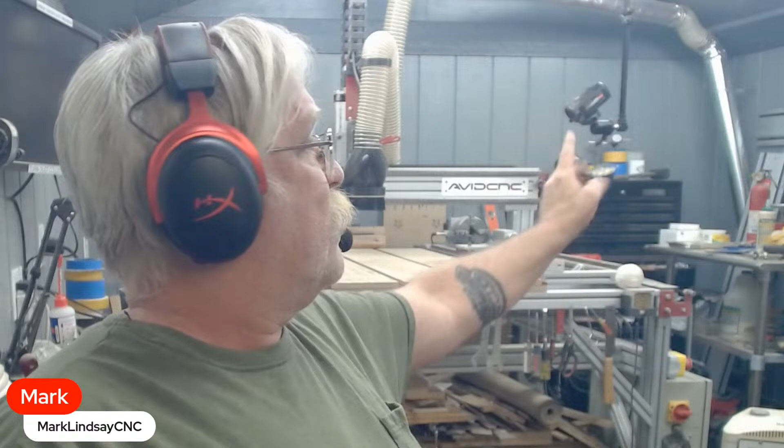So it's on a separate circuit. Each wall in my shop is a different circuit and the lighting is a separate circuit. My shop vac is over there, and my dust collector is also wired in over there, onto this wall circuit. It needs a 20 amp circuit.

My spindle is 220 volt, so it's on a 220 volt circuit. So all of mine are on separate circuits and I don't have any issues at all.

It's going to depend on the voltage of your VFD and spindle, but it's also going to depend on the amperage that your CNC controller and the machine itself takes.

My CNC is running off of the back wall circuit, and my computer slash controller, because I'm using Mach 4 right now. In fact, right over this shoulder, you can see that black plug right there - that's for my computer slash controller. The big black plug right there, that's the 220 volt, that's to my spindle.

You can't see it, but the control box right there is plugged in on the back wall. I would highly suggest you put the controller and the shop vac on separate circuits if it's at all possible.

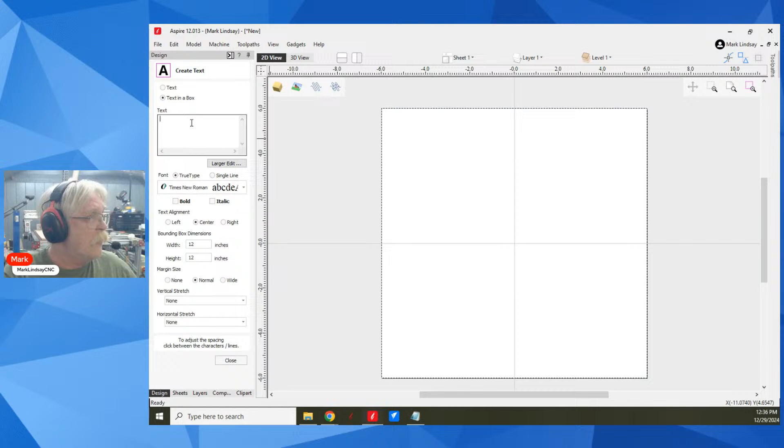I know how to space letters individually when in text mode, but how do I space an entire word? Ah, good one. So you want to, if I'm reading this right, what you're wanting to do is, let's go up here into my draw text tool, and we'll wait forever for it to load up all my fonts. And I'm going to stick with this one here. So you want to be able to space individual words. There are a couple of ways of doing that. Let's say...

Mark Lindsay CNC. Okay, close. If, for instance, these are too close together... I shouldn't have closed my text window.

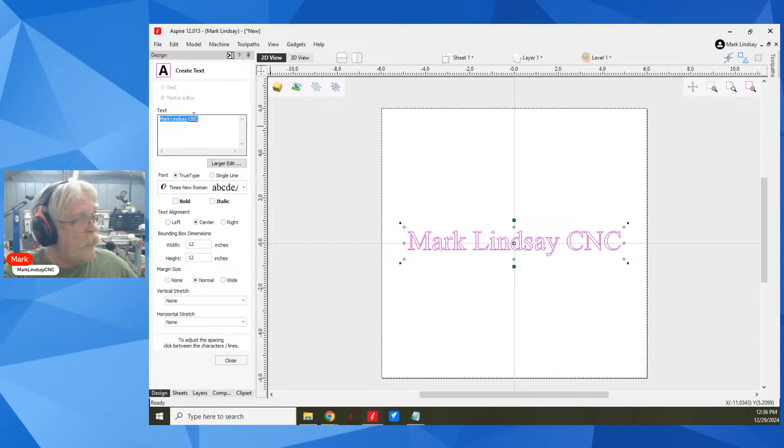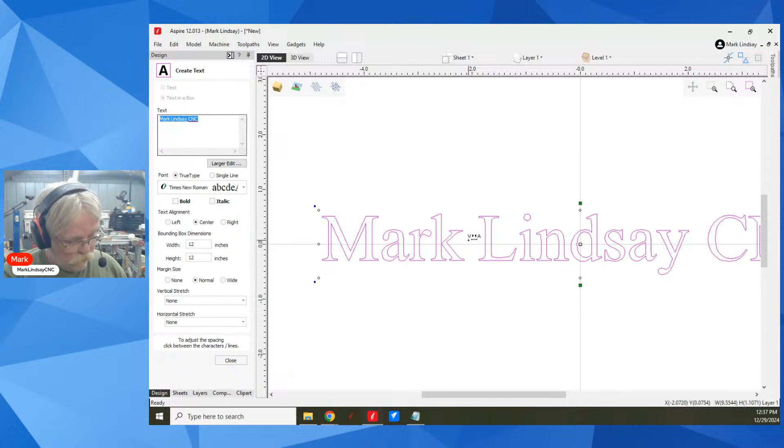If these are too close together, here within the text window with my text selected, I'll zoom in a little bit. Look at my cursor - you see how it has the plus sign? Then we have the V and the A with arrows pointing towards one another, little arrowheads there. If I click on that, it's going to bring those two words closer together. If I hold down Shift, you see those arrowheads point away from each other - now we're going to move them further apart.

If that's not enough, the only thing you can do from here is split them up by converting them to curves. Now, I don't think I can break text into lines. I would have to convert this to curves and then move them around individually.

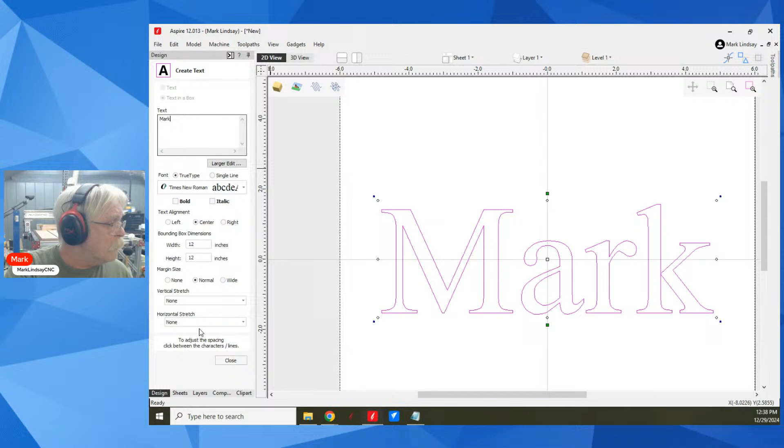But what I could also do is do each word separately. Now, this can be a pain, a major pain. And let's bring that margin size to normal. Well, I'll just close that.

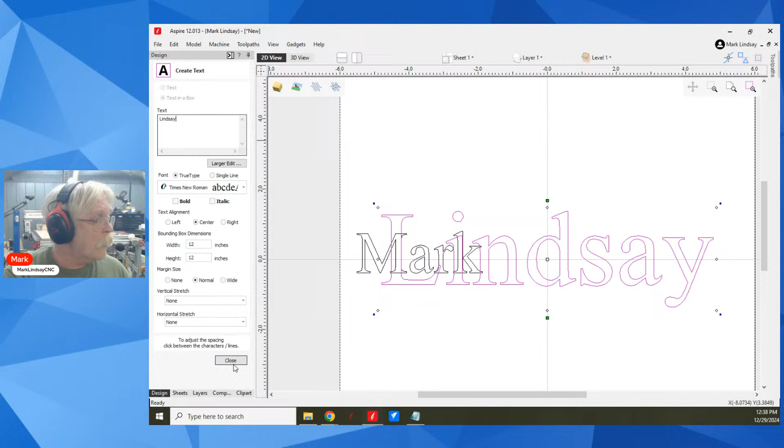Go into move and transform mode, hold down Shift, scale it down, slide it over. Then go back in without it selected and type the words in separately. Close it, move and transform mode, shrink it down - no, wrong one. Control Z, grabbed the wrong button. There we go. About like so - now I can move them separately.

If that's not what you want to do, we can again go back and close. Now, if I want to move these around, I can right click, convert to vectors. Now I can move them anywhere I want by going into move and transform mode, and spacing them out like such.

Now, the problem with this is they're no longer text objects. So if I select them and go back up here into draw text, it's going to open up my draw text tool, but it's going to deselect these. These are no longer text objects, so I can't edit them this way.

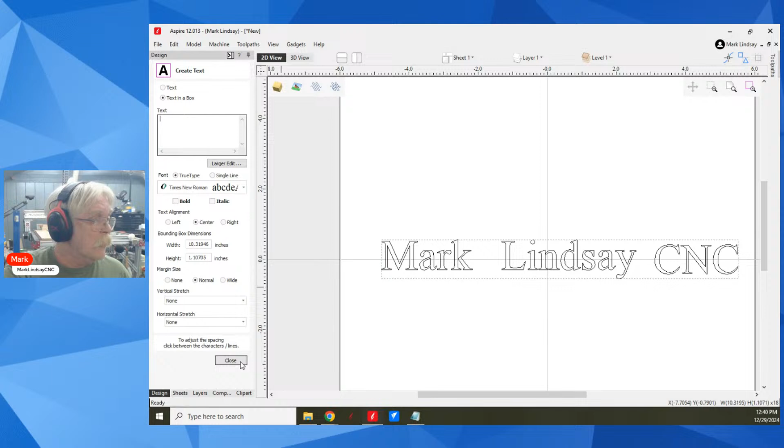So I would have to go in, delete it, and draw new text if I needed to edit, like if I discovered a spelling error or something. So you have Control Z to undo that, Control Z to undo that, Control Z to undo that, and now I'm back to having a text object.

And the way you could tell the difference is because we have solid pink lines. When I right click, they have changed it from convert to curves to convert to vectors here in the right click menu. It used to say convert to curves, which is why I said convert to curves earlier.

All right, let me see here. Still talking a lot about spindle warm up and what have you.

Again, it's always a good idea, as Pete says, best practice to warm up your spindle before you put a load on it - yes, especially if it's been really cold. So let's see here, and I hope that answered your question, Spider. And thank you.

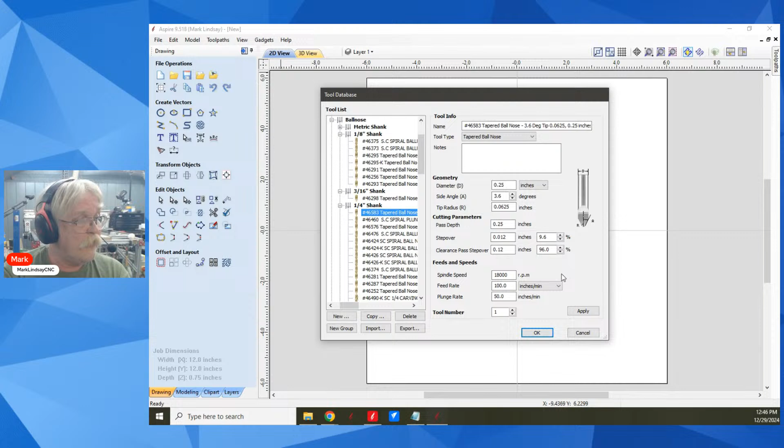Then if I buy a new Amana bit, let's say I buy this tapered... no, let's not go with that, 1/4 inch shank. Yeah, let's say I buy that tapered ball nose bit, the 46583. I will select it like I have here and export that tool file. Then go to my tool database in version 12 and import that tool here. So I only have the tools I own in my active version. There's no sense in having a bunch of tools you don't even own in your tool database.

It just becomes too cumbersome, and it takes a long time for it to load. Now multiply that by the Amana tool database, the Whiteside tool database, IDC Woodcraft database, and the Bits and Bits. You've got a bunch of tools you don't even own in your database. It's just easier to organize if you export individual tools that you actually own and put that into your current working version. That's what I've always done.

It really helps a lot when it comes to... man, I don't know if you can hear that or not, but it just decided to start raining like a son of a gun here.

It really makes a difference when you start accessing tools, because you'll sit there and wait forever for all those tools to load and populate in that tool database. So it works for me. I hope that answered your question, John. You have to do more than just download that tool database. You have to decompress it if it is compressed, a zip file for instance. You have to unzip it and then import that database.

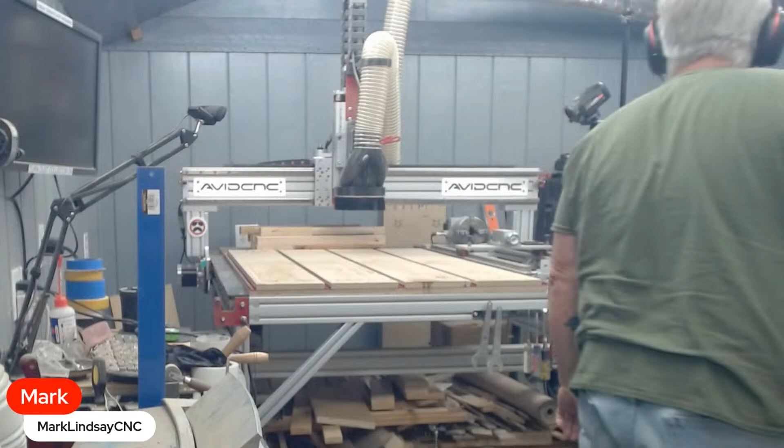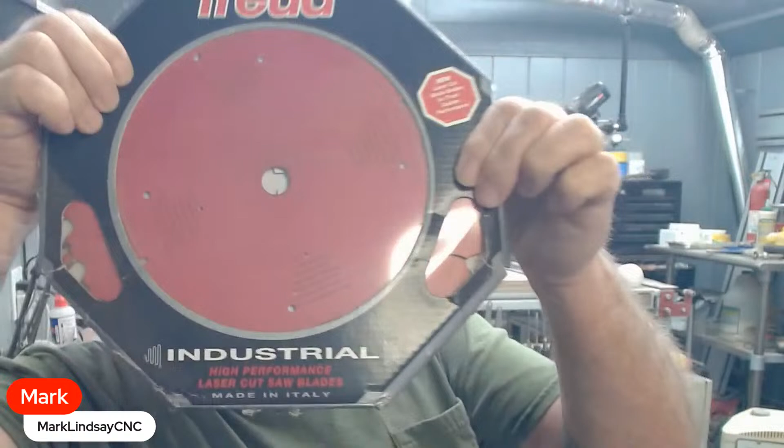There we go. Oh, come on, Mark. Put your fingers under it. It's a very good blade. It won't break the bank. Freud Industrial glue line rip. And it will give you a silky smooth edge.

I joint on my table saw. Now, you're asking, is it possible for it to do that? Anything is possible. It depends on how you're mounting your material. It also depends on the material itself. Obviously it's not straight, otherwise you wouldn't be jointing it, but has it acclimated to your shop, or is it still in the process of twisting and turning and moving? Let's see.

Yes John, I will put a link in the description to that blade. I'll put two links, one to the full kerf rip blade and one to the thin kerf rip blade. And I love these blades. They don't break the bank. They're 50 something dollars each, but that's what we used at the cabinet shop, and that's who I knew to go to when I wanted a glue line rip blade. And they're for ripping. I don't use them for cross cutting, and I don't use them for general purpose, just any kind of cutting. I use these when I need a nice smooth edge along a piece of material.

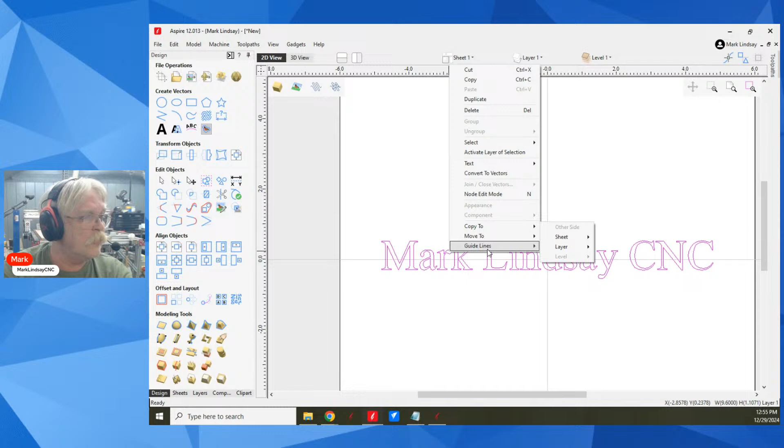David Hittenberger says, ungroup the words from each other, then select the word you want to move. Well, let's get in here and see if that'll work. Let me bring this back up. We'll select these. Now, let's see. Select text, convert to vectors, copy to, move to guidelines. Now, if you meant over here, ungroup, this is not a group. This is a text object. So this is not a group. Make sure you have selected at least one group that you can exit out of any active forms tools. Okay, let's go into text here and see.

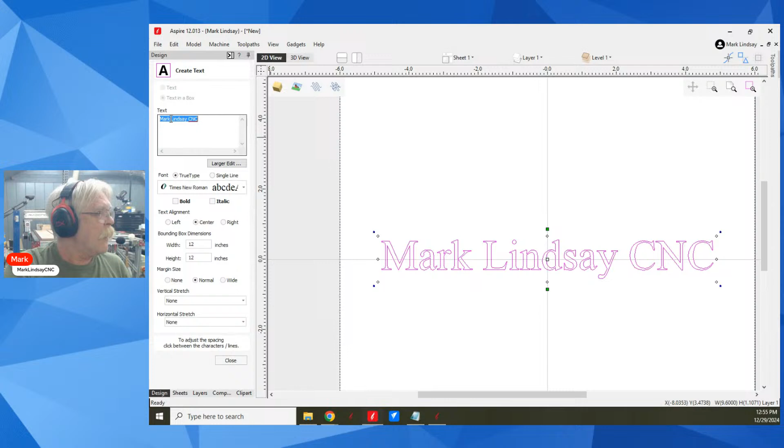I just thought of one that we can do, a way we can do this. And it involves cheating the system a little bit here. What I'll do is I put my cursor up here in my text box right in front of the L, and I'm going to click backspace so that Mark Lindsay is one word. With that cursor still flashing between the K and the L, I'm going to do a hard return. Close. Select the text, right click, text, break block into lines. So now that's separate from that.

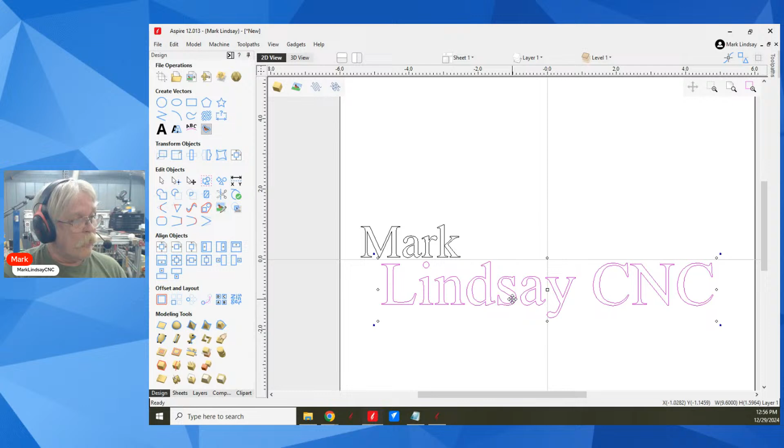Now I can hold down Shift, resize, bring that over, say here. Nah, I'll put it above my Y0. And hold down Shift, resize, and bring that up above. And now I can move it around. So that's another way. Cheat the system. And we'll drag this about like so. Hold down Shift.

Nah. Well, anyway, you get the idea.

John Thumb says, I created a file to surface my wasteboard based on your video, but my cutting area is smaller. Is there a better placement to have it start other than the middle, like where it overhangs in front? I generally don't start in the middle.

I did similar to what 8 Center says here. I go front to back. I surface along my Y-axis. I set my origin and my XY0 to this corner, both in the software and out here on the machine. I set it to the corner of the spoil board.

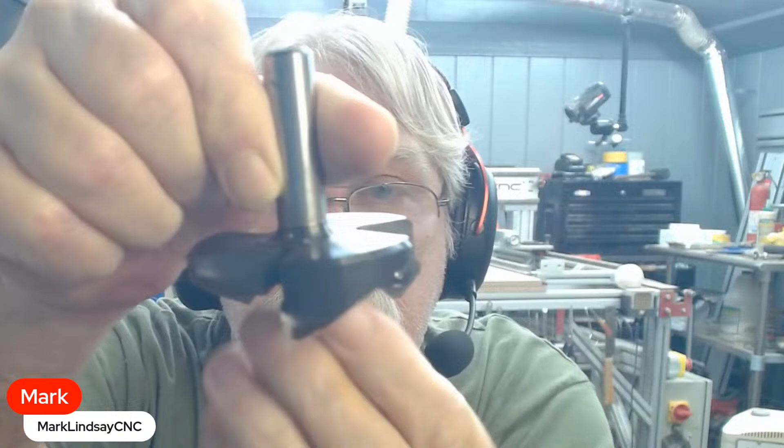This is my surfacing bit, a 2-inch Amana RC2255, and I'll put a link to it in the description when we're done. Fair warning, it's pricey, worth every penny. It's got these replaceable carbide cutters, but there's no cutter in the middle. If I just go plunging straight down, I could very well bottom out on any of these tapers or any of this and just either possibly stall the spindle, destroy the bit, or shatter a piece of material.

You don't want to plunge straight down. But if you ramp it in, meaning it's coming in at an angle until it cuts down to the depth, then starts moving flat, then it's fine. And again, ramping in the plunge moves on a pocket tool path is as easy as one check mark and then a distance. This is a 2-inch bit, I'll go 4 inches for this particular bit.

And that's the same with, say, a profile tool path. You can ramp here, just click add ramps, then choose what kind of ramp you want. But again, a minimum of double the bit's cutting diameter. No ramping when you're drilling, I don't think there's any ramp there. Yes, you can ramp the clearance tool plunge moves here, 1/8 inch end mill, 1/4 inch, and that's in a V-carve tool path.

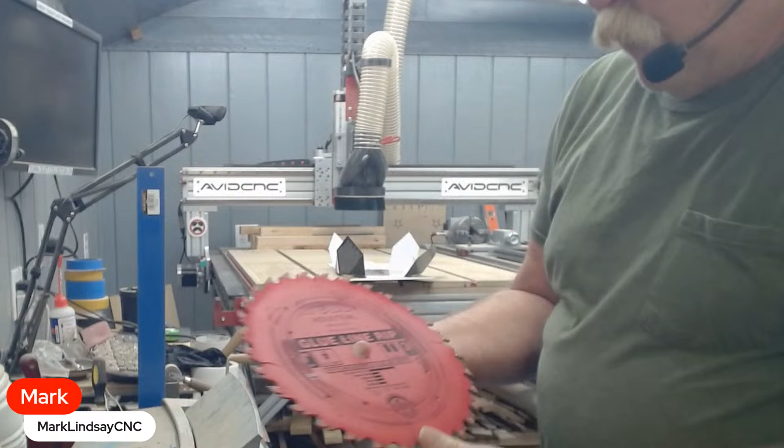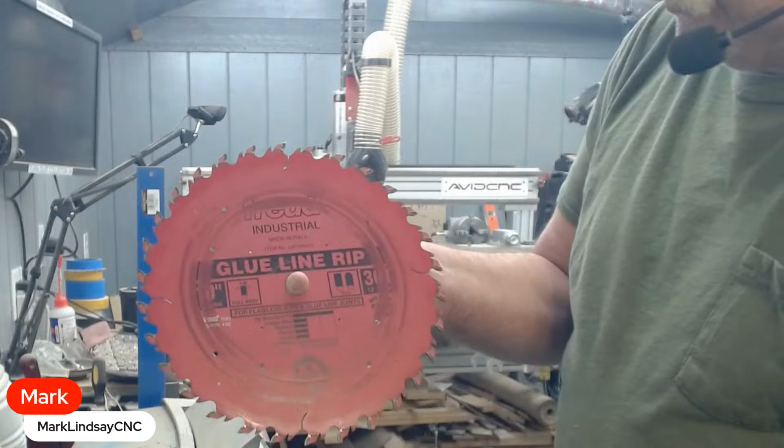No, they're 30 tooth blades. This is the full kerf for ripping up to 1 inch, well, it'll actually go more than that. It's okay for cross cutting, though I don't cross cut with it. I don't use it on plywood or laminates, and it's not recommended for non-ferrous metals. It's a good triple chip grind, 30 teeth. It's a good blade, I like it a lot. Used them in cabinet shops, and it's really worthwhile to me.

I do a lot of jointing on the table saw, and there you can get more expensive blades, but I haven't found the need, unless you do a lot of laminates, melamine or something like that — there are special blades for that as well.

Is it called a glue line blade because the cut is suitable for gluing? Yes, absolutely, that's exactly why.